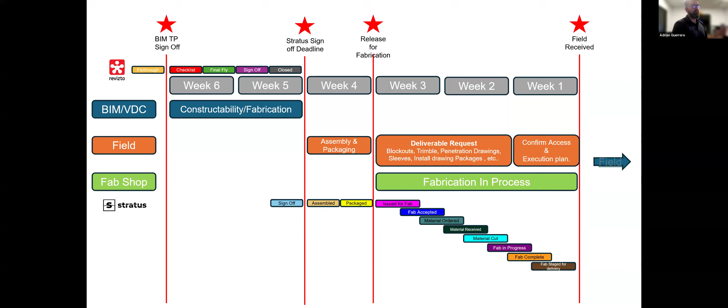Because our model, using Stratus - I don't know if you guys are Stratus users or not - it has to be ready to assemble, fabricate, package from inside your model. You have locked yourself in to having to bring yourself up. It levels up everybody when you get into this world, especially leveraging Stratus, because the model has to be perfect. Then it gets published, you have to kick people out of the model, and all of these things happen. You want to push this to the finish line as close as you can, and we've agreed that 3 weeks before it gets to site is what we need.

And then leveraging Stratus and Revizto together, which I will highlight, you can easily have these conversations. That's why they make such a good pairing in essence. It's really led to a lot of our success, especially for transfer of information, having great visual conversation, not just spreadsheets.

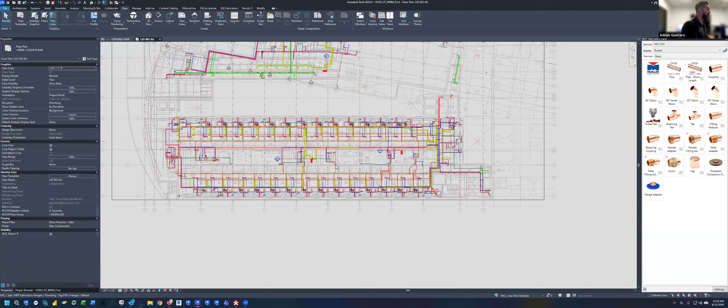And what we're doing is we're obviously designing and detailing. This is a plumbing model that I'm highlighting here. And as we're designing, we have to apply certain properties and parameters that we want Stratus to see for when we publish a copy of our model to Stratus.

As you can see here, what Stratus focuses on is kind of like any constructor. You have a work package. You have assemblies. They don't call them spools for whatever reason, they call them assemblies. Revit does, that's why Stratus had to adopt it. You get package numbers, and we'll go into that.

You get a QR code for Stratus. You'll be able to just create any labels. You'll be able to snap a picture and it'll take you right to the information that you need. A little snapshot, any item numbers, and then the status.

So the status of everything - so as we get to maybe about DD or starting into the CD's population, we start to publish to Stratus. And we want to set up very specific views that we can start curating within this environment, because all this is a snapshot. We're not going to be muddying up what's going on or corrupting anything that's going on in Revit.

So you're going to publish from Revit to here, all those parts and pieces as you design and iterate. And then what we like to go through is we want to make sure that all of our cost categories, all the services that we use within Revit get published here. And then that way, when we're grabbing the parts, it's educating our field, our purchasing side as to what we broke out the cost of the project and how we loaded the project for those cost codes.

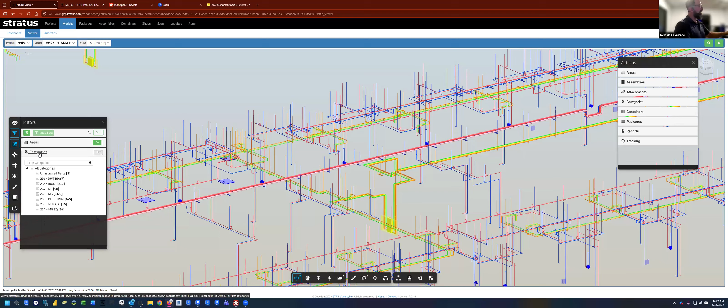So if I'm getting this new shower valve for this project, it's RFA. I'm not going to actually get the ITM. So we will embed those cost codes and those things and the tag numbers of these items. And then we'll start to bring this environment to life. So when we turn it over to the field, they can actually just grab and go and build their packages and their assembly.

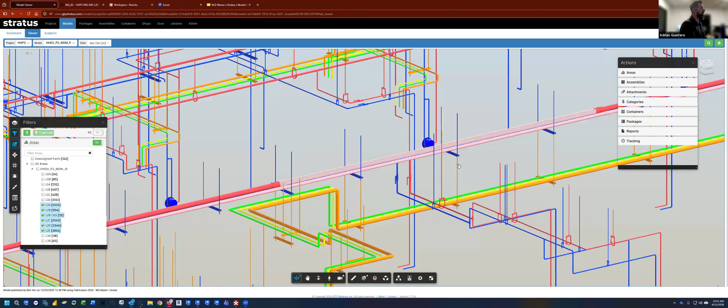So where we start with and everything that we do, what I've done is I've just broken this down into just level 2. And these are built out by areas. And I'll show you what this looks like.

So we're just going to do a quick graphic override of the actual area. So it's overriding - now this is your takt plan, your zoning, your chunking of how the job is going to be constructed. We all have sheets and documents that are match lined and a certain size, but life safety, corridors, how we're actually going to construct the project, they get broken out completely separate.

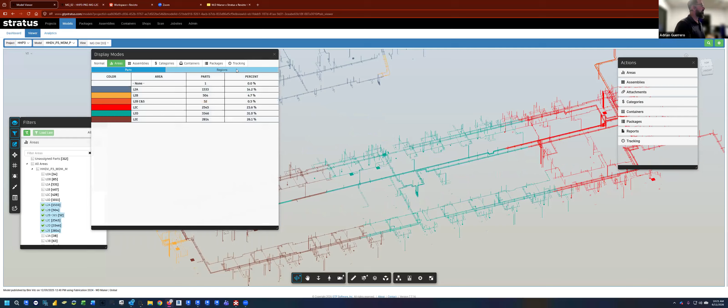So we build these regions within Stratus, which is so advantageous. And this is how the project was actually chunked out to how we had to construct. So we were only allowed, and we started here - we had to start from this side, only affect this area. Then we can affect this area. Then we can affect that area. And Stratus allows us to break that up.

Again, it's transfer of information. It's letting everybody know your focus is here. Stay here, manipulate these packages and these assemblies, get these parts and pieces. As you can see, these are all the parts within each area. So if I'm going to limit to...

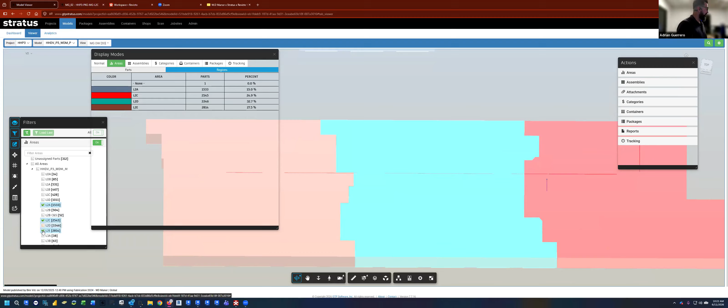Okay, this is the total amount of parts in this area that we're going to be affecting. So we're tracking everything at a part level from when it gets procured, when it gets built, when it gets shipped, when it gets installed, when it gets inspected. So that's what Stratus is doing for you.

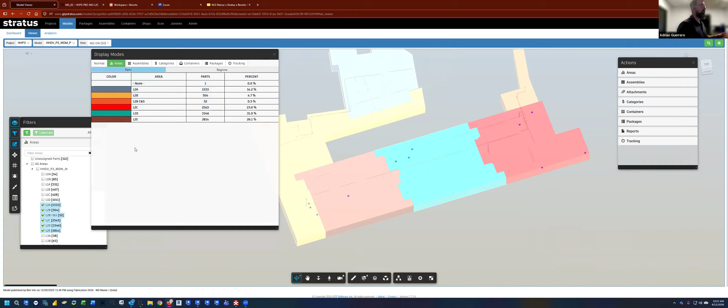As we're building this environment, we take that into Revizto. We'll go over stamps later, but this is a dashboard. We're grabbing that area, grabbing that part, grabbing that property, grabbing the number of parts, and putting them into areas. We're talking area level 2, medical gas.

We have 15,000 parts, and we need this area signed off and ready for constructability by these dates. This allows us to look 2 months ahead of time, so we can start guiding our BIM team to focus on these, because the construction team is getting in there hopefully around 2 months beforehand, starting to plan the project, break out the schedules, going through these things with the project managers.

Then at 4 weeks, we're giving them the model. We're saying it's at a good model health that you can start your fly-throughs. This guides the field team to start looking at what we're populating, how we're breaking out their assemblies, how logistically we've set it up. Can you fit 20 footers in the area? Do you need to cut it down to 12 footers? What is your elevator access? Whatever that is, they can start to help us curate and be successful for that 2 weeks out.

So remember, we talked about the field received and all that, and that full planning, that we needed 3 weeks for the Fab Shop. Well, we need 2 weeks out from that date. This allows us to help guide that healthy tasking, where I go through my checklist - there's a long list of items we go through: make sure optimization is good, make sure we've verified the submittal, that the parts and pieces are correct, make sure all the components are available, make sure that through stamping, all the items being released within that area have been verified by the field, the equipment is in hand, and we've made any model updates.

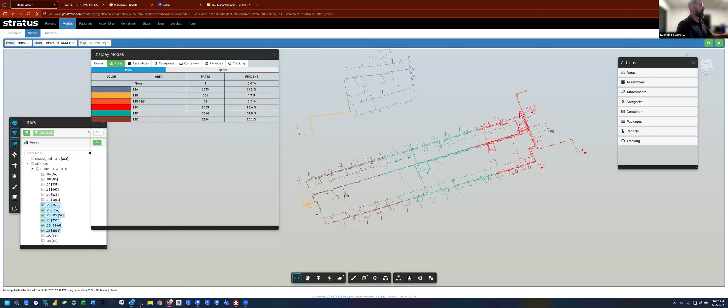So again, this is the override. They would chunk out that area - we're talking medical gas here. They would assign this into Revizto, and we would sign this off and hand it off to them so they can actually start building.

So within this, when you're planning and breaking out, we discussed earlier how we like to have everything at a week's worth of fabrication. If my crew size is 2 individuals, I need a week's worth for 2 individuals. If we have 4 individuals, so on and so forth. Stratus, when you grab the parts and you have ITMs, it can actually give you an estimated amount of time, schedule hours, that we assume it's going to take to install this.

You can apply factors to these things - if it's a greenfield project or an existing project, you can add factors and build upon their charts. So when a foreman breaks these out, they could highlight the area and see, yeah, there's 150 hours, 140 hours - that's 3 individuals per week, I'm going to build this as a package, right? So as they're assembling and building packages, it then educates them.

And then when they get it on site and give it to the field, they're going to monitor how long it took. If it was released on Monday and they were done Thursday, well, now they've educated themselves and educated us that maybe we need to ramp up or take back some of those scheduled hours, so our foreman can feel secure with it. When the general contractors ask us how long does this take, we can give them plus or minus 10% amount of time that we're good to go. So using data has really been a game changer for us.

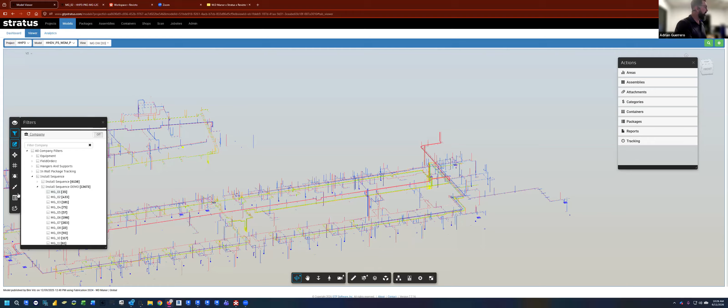So when you're building your packages, that package number we were talking about - every package name comes with the area you're in, the system you're in, the discipline, all of those things, and breaks it out per project. We're using the package number to be the sequence of how we're going to install. Let me give you some context here - if I was to look at the packages, how do I know which one of these packages is going to be first? Look at this laundry list, right?

I don't know which one it is. I'd have to talk to my foreman. He'd have to remind me, he'd have to write it down. You'd have to do all these things.

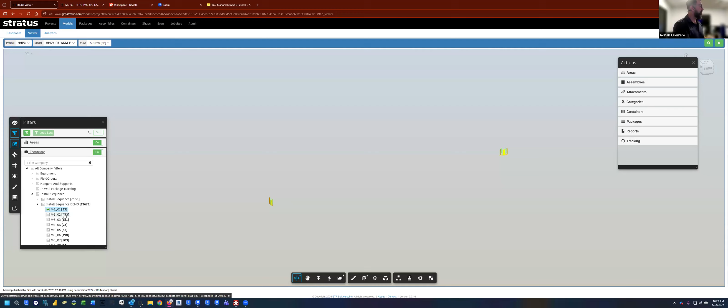But what we're doing is using the package number to be in line with the delivery date. So we'd be installing the zone valve boxes first, then populating this area, and so on and so forth.

We'll be moving through, and I can give this to my field team and allow them to provide feedback. 'We don't have access to this area.' 'Why are you planning for this?' 'Well, why don't we have access?' 'The framers have an RFI and they can't affect that area.'

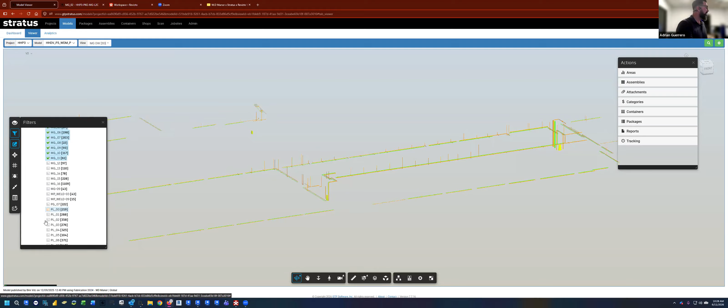We're planning out 3 weeks ahead. Now we need to adjust to another area, and I can just change that sequence and have a good, healthy conversation. Along with that, we have multiple disciplines within our organization - med gas, plumbing, solid waste, duct work - so we need to be cognizant of who's all working within that area.

So then we can start layering and seeing - if you can see my screen, I hope I'm not going too fast - and I can start having conversations as to who's going where. 'We're all in the same area.' 'Well, I'll be on this side of the corridor.' 'You're going to be on this side of the corridor.' And you can just turn on these filters.

You can design any filter as you wish within Stratus and Revizto, and you can see how you sequence the project. This foreman will go first, this foreman will go second, and we have 5 foremen we have to go through for all of our disciplines.

We can have a very visual meeting with everyone, because we kind of stick into this little silo of 'I'm only responsible for this.' As an organization, we're really trying to have everybody step outside and say, okay, you planned for this, great - does that work with your whole team? Then let's expand upon that - does that work with all your trade partners?

So that's our journey, that's what we're on. All these properties, everything within Stratus, gets published and imported right back up to Revit. So it updates Revit with where we are.

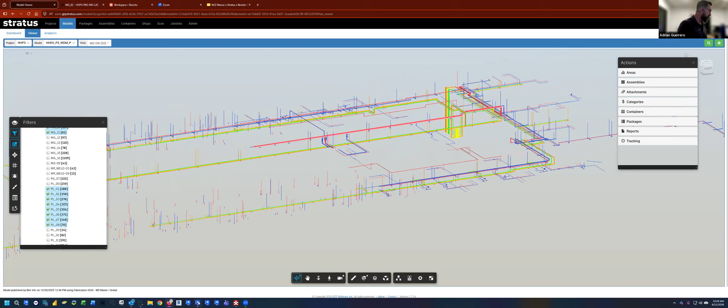So if I'm in Revit and I'm working - and again, we're always getting changes, we're always having to be reactive - you can leverage these filters, just like you would in Revizto and or Stratus, and I can see where the project is. We have the graphic override that if it's red, we can't make any changes or adjustments without talking to the team. So this is true transfer of information.

It does take publishing and importing, but we do that on a scheduled basis so we can be as healthy as possible and understand what all of our members are doing, because we're a team - it's not just different departments. We're trying to talk to each other using these tools.

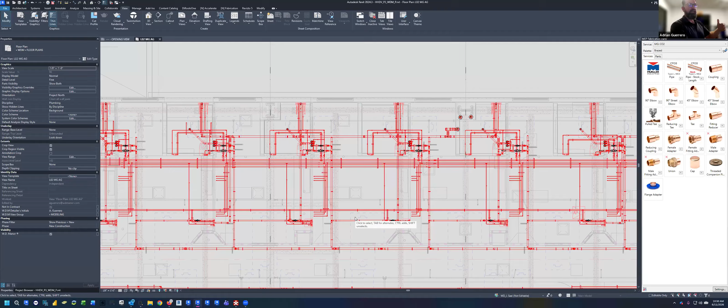So as it gets back into Revit, then on the scheduler for Revizto, we can get these items and information over to Revizto - now this is the project within there. As you can see, we've looked at the parts and pieces, we've planned, but now you can actually plan for construction, because that's where you're going to be losing your hours and losing efficiency. You could be very efficient all the way up to this point.

It's getting it on site into the right area and not having to move it 3 or 4 times, not having to stop because other trades are in the way or because we didn't plan accordingly, and getting that work package up and in the air and then on to the next one.

As soon as you break down that process - and that's just for us internally - as soon as that process breaks down, that's when we become the most inefficient. Because then you have loose assemblies just lying on racks all around the project, and we don't get the racks back, and then we're having to build more racks to accommodate our fabrication, and it just tumbles down.

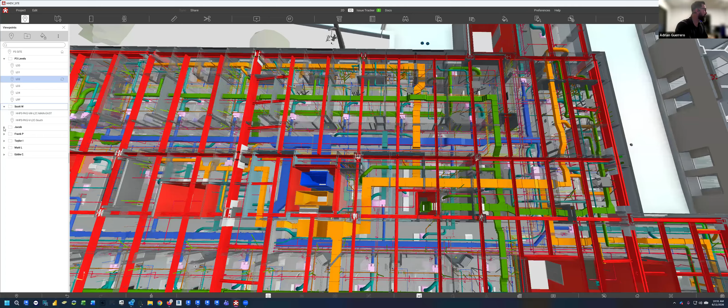So within here, let's just get to the parts and pieces. If you want to look at Revizto, you guys can do all that, but I'm going to show you how it ties into Stratus. So what we do is when we build the actual packages - this is the work package - as soon as they get this work package complete, it falls off on these viewpoints.

So we're only giving the field team enough information for 2 to 3 weeks out - that's what they're going to be working on, and the documents they're going to be working with. We don't leave all the viewpoints for all of it, it just gets too muddy. So I'd suggest cleaning it up and curating these things.

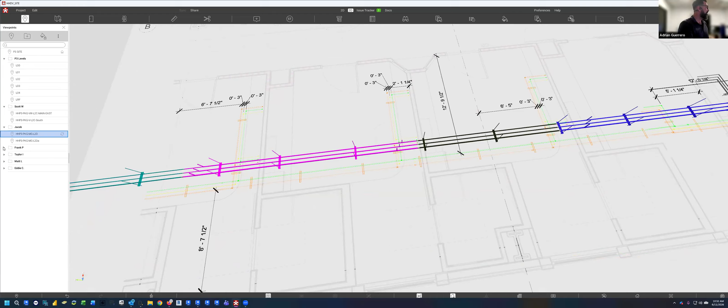So for 3 weeks out, we'd like to populate these viewpoints, which can provide the document and the work package they're going to be working on, right? And again, that's all just a click of a button to your field team. All your property that you get from Stratus is available to you in Revizto.

So you have your favorites that you can set up. If you're looking at only the quick properties - what systems we're looking at, the height, the length, etc. - we need that information as well.

When we're specifically talking about Stratus, we've broken out this graphic override. And what this graphic override is doing - this is the same for the first item number, the first assembly, the first package, the first sequence. It's all the same color coding so they tend to learn visually what they're looking at, without having to select every part and piece to see what it is, right?

So we're taking from Stratus how that graphic override and everything worked, because everybody is so used to that within our organization now. And we're able to mimic that here within Revizto, so they can quickly see what those assemblies and those packages look like.

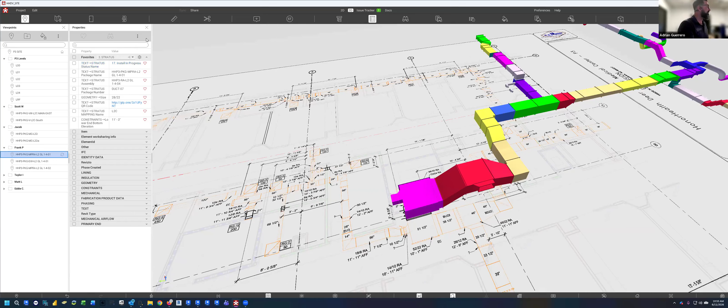Let me get back to here.

These are a few templates that we use. And this is what's great about Revizto - it's easy for a guy like me, who comes from the field, who didn't even have a computer since 2018, just started using models. I could never use AutoCAD. Revit has made it very, very easy. Stratus has made it very easy for actual people that can construct to be successful. And that's what's been so great about it all.

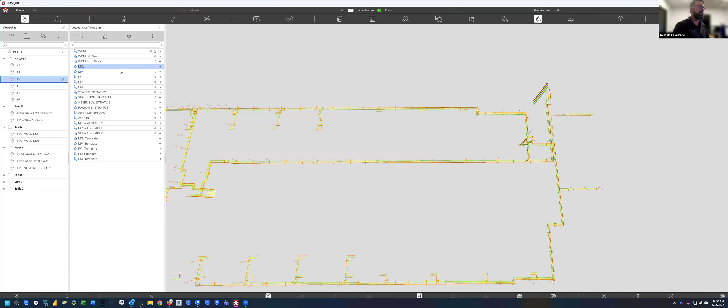And then just the ease of setting up these little quick filters within Revizto is a life changer for us, just for specific deliverables - the status, right? We're talking about the status of the project. Where are we at? You could hover and it'll tell you where we are.

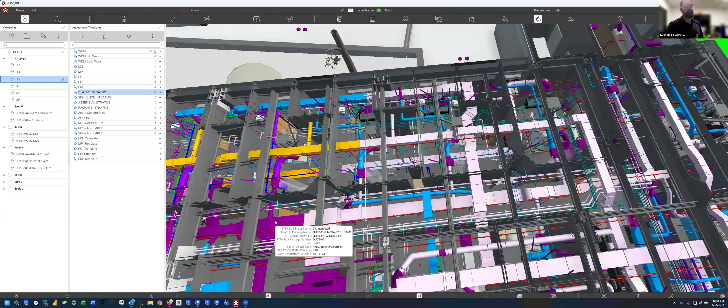So if you're a general contractor, an electrician, or a framer, you know that the packages that look like this with this graphic override are install in progress. If you hover, touch on your iPad, you know that this area has been inspected.

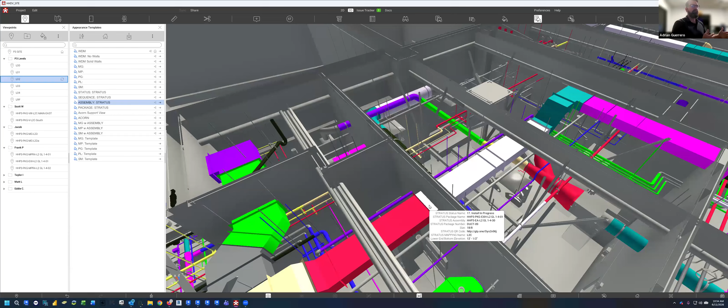You could break out assemblies if you have loose assemblies, or you're trying to have a conversation with the framer, and maybe he needs to leave a little opening for you because your assembly is built a certain way. You can have that conversation and see what your foreman or general foreman had planned for you in the field, or let your foreman know not to ever do this again - this hurts us every time, so we can all educate ourselves.

And then this is just a quick package override. As you can see, it really doesn't - because we're using, I can just show you real quick. This is how we're doing it, in case anybody's interested. There we go, we're just using the wildcard.

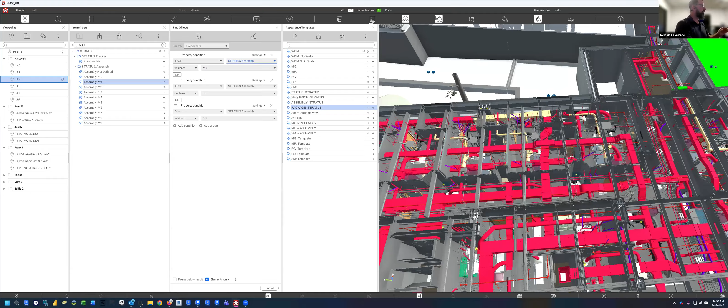And if it ends in a 1 or a 0, all the way to 9, that provides a graphic override. So for item numbers, assemblies, packages, we're using that wildcard with the numbers to do all that. In area A there's only 1 or 2 packages for each discipline, so you're only going to see about 2 graphic overrides. And if the foreman in Stratus just names them all number 1 for whatever reason, you can see here it goes blood red all over the place - so the process is breaking down.

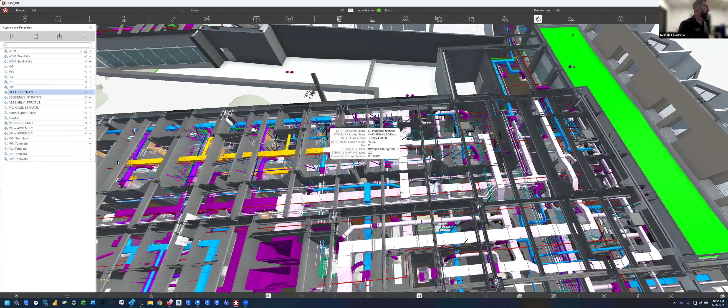But the last of the graphic overrides, which is very valuable, is the sequence. This is where you can see everybody together. So within Stratus, you're looking at your discipline for your view, and you're looking at multiple models, depending on if you break out your med gas, your gravity and pressure piping, your HVAC, and your mechanical dry and wet.

You can start to see here what the planning is and how the project is sequenced. So what we've done is if it's been installed, it turns gray, right? So we can see that it's transparent, that it's already installed, and now I can affect this fabrication.

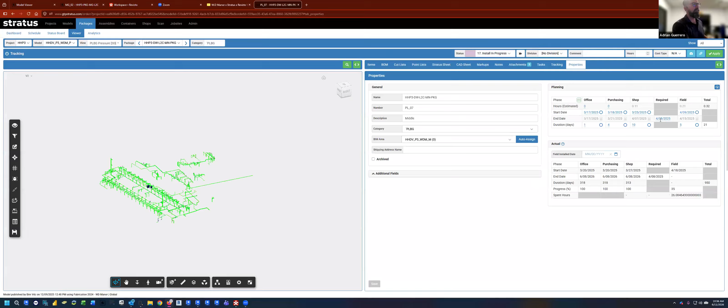If I'm the duct individual and I want to know when this person is going to be installing this, so I can plan for my team because they should have been out of the area, that QR code that's been easily provided by Stratus can be provided to you in Revizto. So I don't need that foreman — I can go into his package and see what his planning is and make sure it aligns with what I need, or if I need to adjust. Right there, this is the required date, and I'd make sure I gave them a week's time to get out of my way, or a few days. Again, it's all about transfer of information.

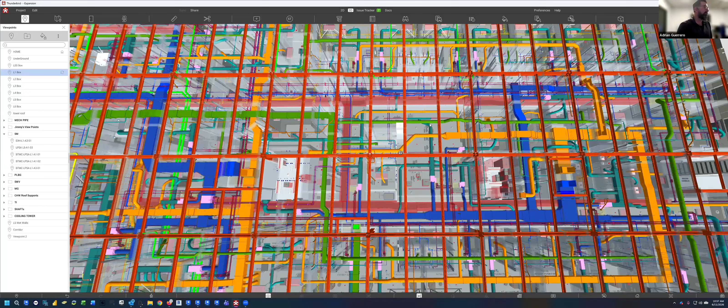So I'm going to jump to a new project — that was just an example. This is actually the live project. That other project I was showing you is complete and has built upon some of the workflows, because we've been with Revizto now for 3 years, Stratus for 5 years. So every project we're learning something new, we're learning how to better protect ourselves.

So going over what we had talked about before, which was how we provide this to our field teams — and this has been really good for us. Let me get to this one. This is how we instruct our field team.

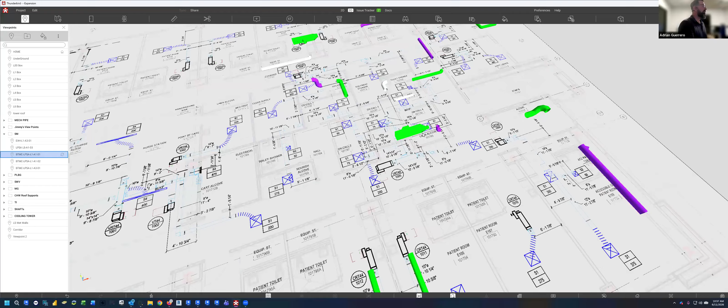Not everybody has a laptop. Not everybody knows how to view a model. Not everybody has been in that 3D world before. They love the 2D documents, and that's just what you have to deal with, what you have to work with. There's nothing wrong with that.

So before we were with Revizto, when we had these models and such, we had to dumb it down. We had to put it in 2D, try to get buy-in for the 3D world, started working on our fabrication being 3D. We got rid of all the paper within our fab shop with the help of Stratus. And now we needed to affect the field. So getting Revizto involved, seeing how you can manipulate their tool — we already had a workflow, we already had things we were good at, it was just that we didn't have the right tools. Bringing in Revizto gave us that tool.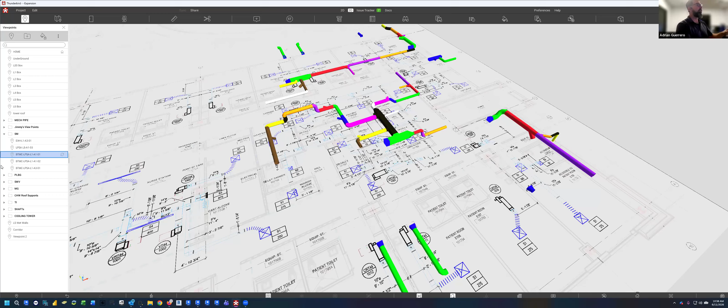So getting out there and instructing, we instruct our field to get to this viewpoint, and that starts them. It gives them their 2D doc, and it shows them the week's worth of work for this low pressure design that they need to install. And we instruct them to go here — the people that love 2D, this is where they live. So usually we try to team them up with somebody that can manipulate the model, but also 2D.

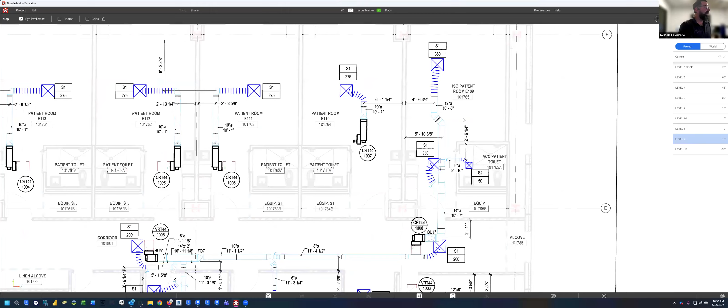If they want to get any measurements, they have it here. They're not going to get lost and flown out in the middle of nowhere trying to find something — they're so afraid of pushing the wrong buttons. This here just gives you a 3D kind of look, but it's in 2D form. You can't get lost. And when they're trying to affect a very specific part, they just double tap on their iPad and this is where they are. Then they double tap their finger and they know which assemblies they need to be installing, or how they're sorting, or how they're going room to room laying out for everybody.

So we've gone from Revizto 3 years ago, from having to have these packets and everything, even to the early days of Stratus, where we'd have your ISO drawings, plan view drawings, and hanger drawings. We're upwards now from, let's say 2 years ago, we had 12 iPads in the field, and we're allowing the field to dictate what they're going to use — is it drawings we're printing, or are you going to use iPads? Now we're upwards of 70, in 2 years. So that's how it's just catching fire — we can't train enough. And the individuals who were kind of hesitant, if you provide the information this way — I'm not saying you have to do it this way, but we have found success.

Give them the 3D, give them the graphic overrides, give them a 2D document. And then for the most part, by the time they're done with the project, everybody is able to manipulate the model, look at the assemblies.

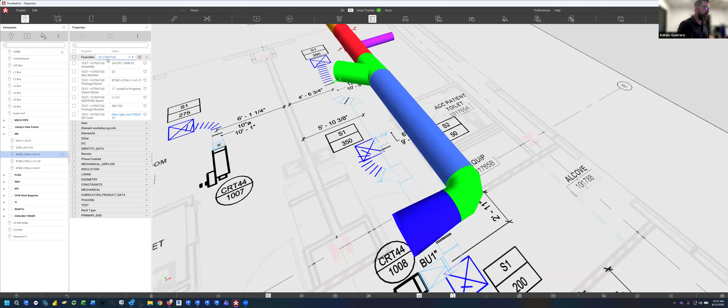I hope I'm good on time because I wanted to go over one last thing, and that was the issue tracker.

What have we dreamt about for so long is connecting upstream to downstream, letting the Fab Shop know our successes and where we fall short, letting the BIM team know the same thing, letting the field educate us on what their choke points are, and just having that conversation.

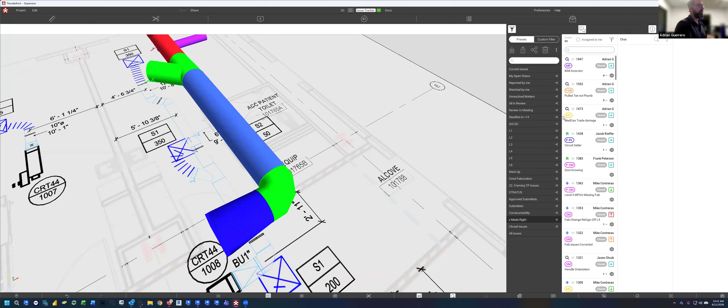They provide these pins and they give you a stamp template here. This is just one. The BIM was incorrect. So all the efforts that we did, everything that we have done, just like mud on our face, I'm highlighting here, they drew it backwards.

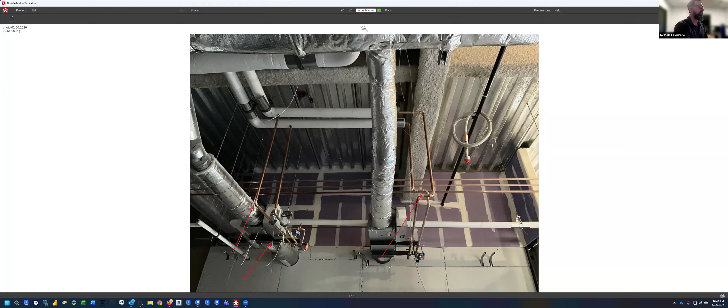There was probably a change, something that flipped. The VAV was probably one instance of design and it flipped and we didn't capture it. So then the field team had to flip this around because we designed it this way. And obviously, everybody says in the BIM world, everything works.

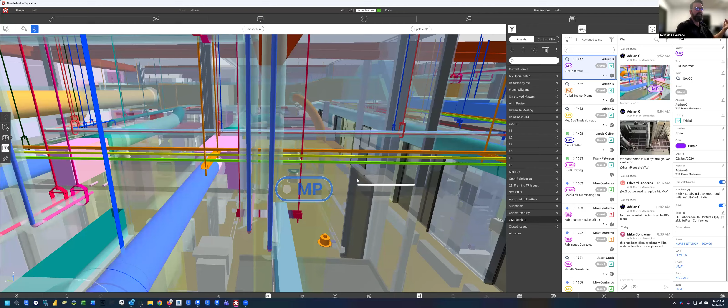But now I'm able to bring this up. I'm able to give this to our BIM team and be like, look, I'm not coming down on you, but these are the mistakes that you have made, and let them take that upon themselves. Again, checklists, all these things, and they can educate them, right? And we're just having really good open conversation.

With the Fab Shop, I used to have to go to the field, walk it, ask if there was any issues, get the information, bring it back to the Fab Shop, type up like a little incident report, like, hey, this happened. Well, the Fab Shop is in, right? The Fab Shop can see these.

These stamps are directed to me and the Fab Shop, and they can see that we didn't have these pulled tees both plumb level square. So now we know that we need to go talk to the individual that's manufacturing these things and say, hey, is the tool letting you down? What's going on? Are we not level? Do we have like a slight degree off on the setup?

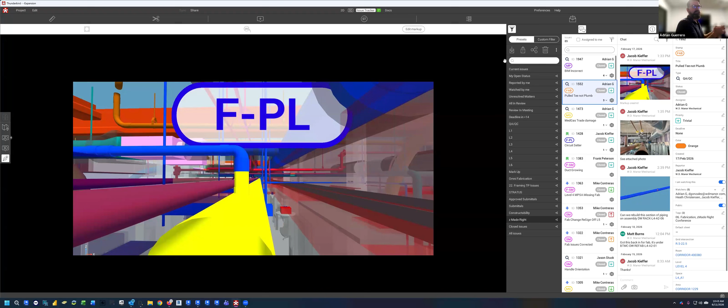Like what's going on? And this individual was training another individual, and we can see that from Stratus that this person was training this person, and that there's just more education needed, right?

So the true transfer of information, we also can grab trade damage, right? So what did the field act? What was their experience, right? When we're trying to have open conversations and you kind of just take care of these things in a silo somewhere, you're in the field, like I'm from the field. I don't want to have all these conversations and incident reports and all this. I just get it done, I get it fixed. But that doesn't help us at an organizational level, right?

We want to know that if the trade partners we're working with are good trade partners, right? Like when they hire WD Manor, they hire a specific level of quality. And we can speak to when we go to these interviews and we're working with trade, be like, look, the last job we were on, these are all the issues, all the trade damage that you had done to our systems. Are you going to be better? And they're like, I didn't know anything about this.

And it's like you can have reports from Revizto and you just look to very specific filters. And then our field team is just applying those little tags and we can run reports and then offer it up for any organization to make themselves better. And then again, if they were using Revizto, they could offer that up to us to help us be better. So the stamps have really cut down, there's education, there's training, yes. We all have conversations.

We all memorialize things in different ways. It's like, learn to use this tool in this way, it's still the same task, but just use this tool in doing it, and the transfer of information is seamless, right? So it's been very successful.

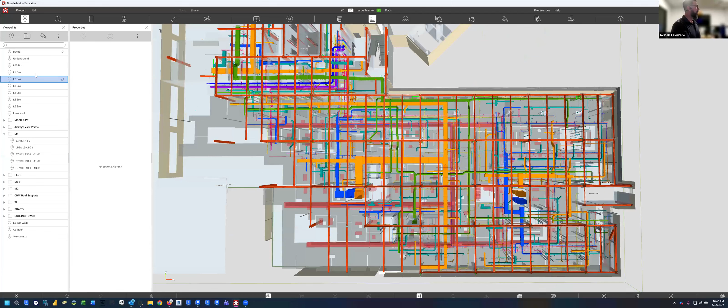Okay, because this is where we hurt ourselves as an organization. Again, from the package number, that ties to the date as we populate the package. It puts the stamp of the incrementer of, this is package 45, this is package 46, and then you issue it off. So that gives us the actual sequence of install.

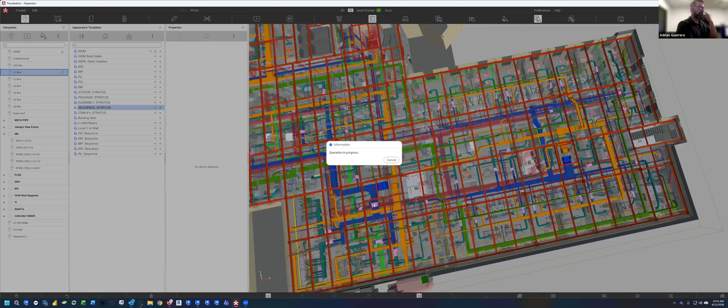So when you're looking at and you're coordinating, right? So this is this project right now. This is what they're working on. Now you can see that everything else is done in this project. They're just tying in the low pressure. All the other systems are done.

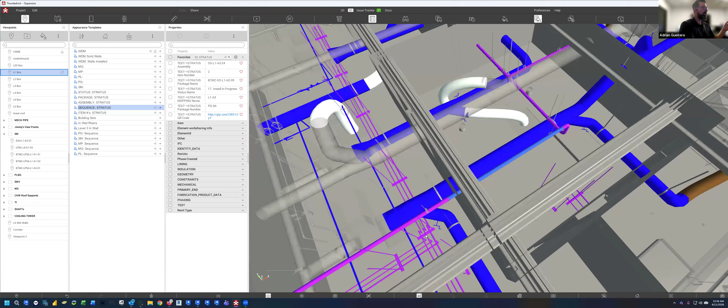Let's try to find the one that we need to have a conversation about. All right, now this one. This is not that big a deal, but this system definitely should get installed earlier. I think they could work around the duct, but definitely not the med gas. So I would have a conversation.

I would talk to my sanitary group, and I would look at what is their schedule. Are they ahead of me? Then I would talk to the duct individual - when are you installing this? Now I could go look at Stratus right now, but we don't have the time. And then I could talk to the med gas guy because they're all planning right now.

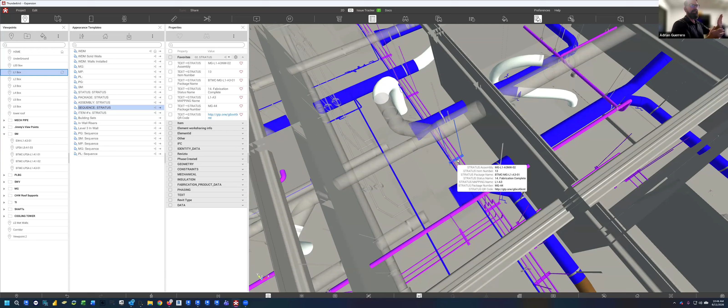They're only going to populate these because we put a condition in here that says only when it's in fabrication, past fabrication planning, will you highlight this graphic override. So if there's pre-planning, that's not - it's, we have tracking statuses. Let me show you those.

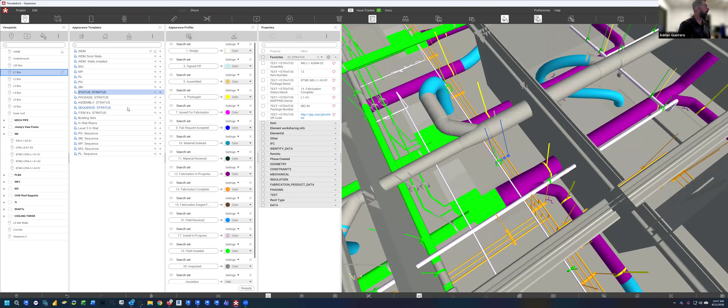So you have designed, signed off, assembled, packaged. If it's in any one of those, we're not looking to it within Revizto, right? Again, there's a handoff from the Fab Shop to Revizto, from the design to Revizto. When it gets to Revizto, when it gets issued for Fab, again, that's that 3-week look ahead, that time that we give our Fab Shop. That's the only time that I want to see any kind of planning, because then it's just too visual for everybody. There's just too much going on to absorb.

And then again, if anything is already complete and installed, it kind of just turns in this transparent gray.

So this has been good for us because all too often, we have our own foreman kind of planning their own ways, and we all know how difficult schedules are. And we're trying to interpret an interpretation of a schedule. It's very difficult these days. Some generals are very good at providing us schedules, and trade partners are good about keeping to those. And sometimes it's just never going to happen.

So we get lost in our planning and our adjustments and our being reactive, and we end up hurting ourselves, putting up a rack of pipe when good and well we know that there's soil waste and vent and ductwork that needs to go above it, and we've had to cut it down on this project that knows these tools, that have these tools available to them. We have done that to ourselves.

So this isn't going to fix everything for you, but how many times did we capture that, right? And that's what we're shooting for. It's so unfortunate - it's construction, these things happen. But the more we can mitigate those things with tying in Stratus and Revizto, it's been a pretty exciting journey. We're happy the path that we're on, and we'll give it back to you guys.

Awesome. Thanks, Adrian. Yeah, this is really fantastic use of property data that is available, right? Taking it to the level where you guys are getting to actual sequencing and being able to review that is, to me, wildly impressive. So thank you for sharing this with everybody.

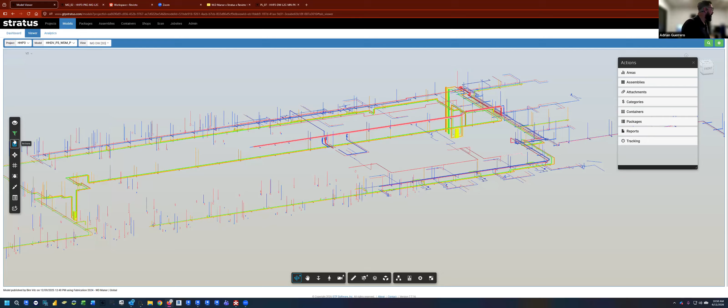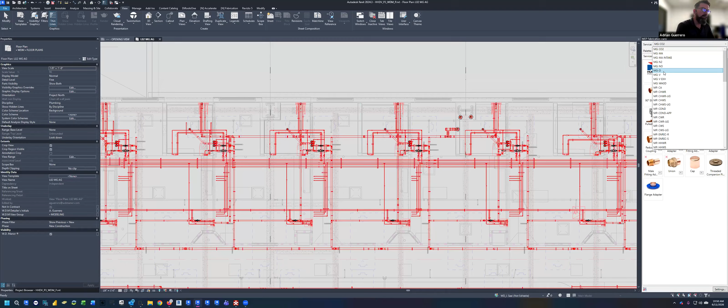We want to know as an organization how well we're doing. The best way to do that, what we found, is by system - we break down everything by the actual system and by the palette that we draw with, so they kind of go hand in hand. When it gets to equipment, plumbing equipment is broken out as a separate specialty, mechanical equipment is broken out too. We do Trimble of all our BIM content, and we've learned that the Trimble process makes us more efficient because we have so many disciplines - we can't just say it's heating hot water, we have to get all the Trimble, all the embeds. If we're going to drill, we get all the drilling done at one time, so we capture that cost on its own as the Trimble cost code. Other than that, any install from the hangers of the discipline goes to the actual discipline, cut and dry. That way you can see the med gas did well - we had hangers and install - the domestic water did well or not so well, and we can break that out. Those are all loaded into the project so we can apply them in our time. I hope that answers your question.

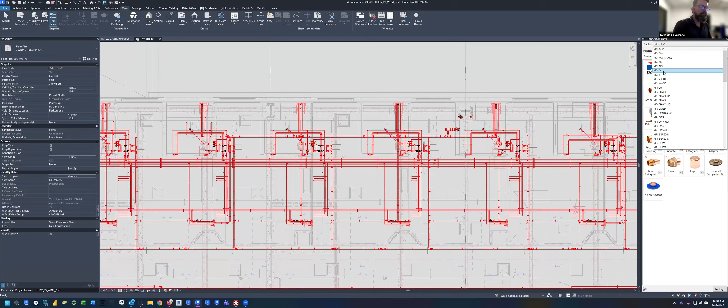And then the filters - again, I'm looking for those palettes we're drawing with. I apply it to the filter, to the cost category, and that puts it here within Stratus. That's the end of that cycle.

Have you looked into 4D simulation capabilities of Stratus? No. Nathan, can you touch on that quickly - what about the 4D simulation capabilities? I think there might be a typo. We have 2D and 3D, those plan views that Adrian was showing, but I don't think we have 4D capabilities for Stratus right now. We've done 2D capabilities within Stratus. One of our choke points is Indian reservations and places like that where we don't have internet connectivity.

So we had to find other ways - Bluebeam sessions or Bluebeam projects to upload documents and leverage snapshots and stuff like that. Having Revizto able to download the content onto your app without using internet connectivity, we've chosen to go that path for our workflow. I know we've had it here in Stratus on certain projects, but we've moved everything over into that environment. Our integrated hub is Revizto - we want to visualize everything in the field through Revizto. That's just what we've chosen.

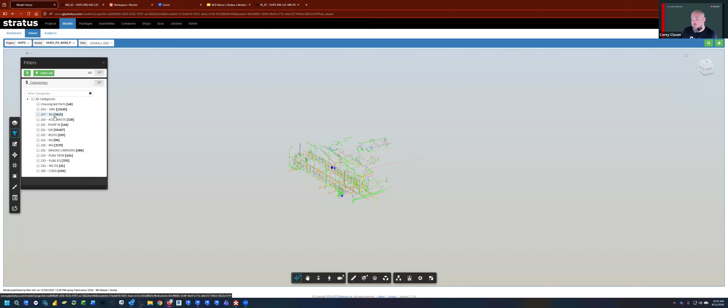Awesome, I'll take the next question. Is there any way to connect Revizto API, Stratus API to show the element statuses live? Or is there a daily sync between Revizto and Stratus?

Currently, it is not possible to link our API directly with Stratus. It's something we would absolutely 100% love to work towards, but right now it doesn't exist. So the sync of information - you could do it multiple times a day, I guess - up to Stratus, back down from Stratus into Revit, Revit to Revizto, is the current workflow to update these statuses in Revizto. That's the way we do it.

Tara asks, how do you turn on category filters on Stratus and input cost codes? Sure, let me just show you what that looks like.

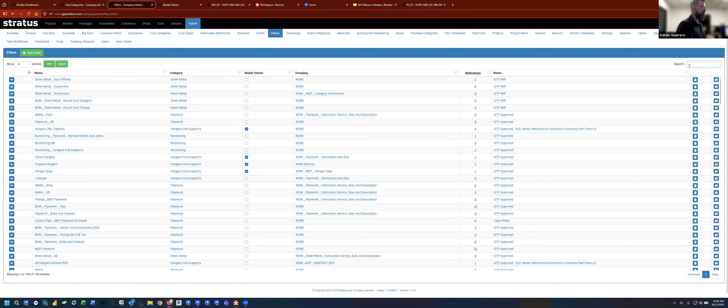Cost categories in your admin - you need to write filters. Again, we use the palette as service discipline, so we use filters here. Okay, so our chilled water - we're looking for these, right? This is everything that ties into that cost category.

So then when you get in the cost category section of Stratus, you will create a new cost category with the filter that you have created, apply the code, and then that is available to you. So when you import those parts from Revit and they come through, they get captured through that filter, and then you can have them available here.

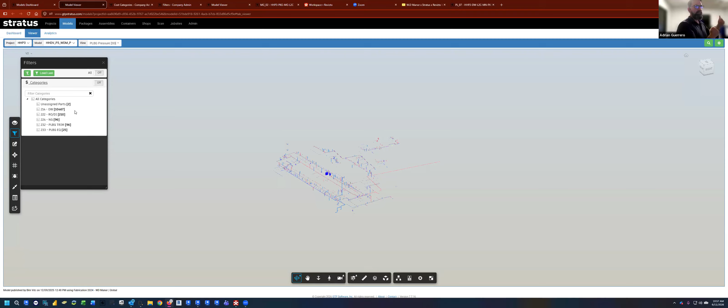If you do not have that filter built, it will not take. So when you're missing parts, I can't just create the filter and have it suddenly be ready - it has to be on the publish import part of the process. So create your filters, go through all of that, create your cost codes, then import everything from Stratus up to Revit and then publish back. Then you can have that show you the result, but it doesn't do it automatically - it has to be import, publish.

Nathan, the next question is for you. Is there a way to speed up the process of uploading a model to Stratus, or a way to optimize it? Yeah, optimizing is probably the better word.

From Revit, what's in that view is going to get published up. So there's certain things that Stratus doesn't need to have in order to function perfectly. Turning off things like your insulation or center lines or content that's not going to be fabricated within Stratus - that's going to speed up that publish process.

Also, making sure that family complexity is something that is looked at - so looking at your database and how things are kind of put together. If there's unnecessary information on these parts, or if third party software has added more parameters to those parts, removing the unnecessary parameters that don't need to come in - those types of things will speed up the publish process.

Yeah, that was one thing that hurt us a lot when we started - the evolved parameters. We didn't really understand what we were doing when we were creating a database and workflows, and it was tying in 400 parameters to every part and piece. So it was taking an exhausting amount of time. Really understanding your database, understanding what those parts and pieces are, cleaning up your views, model health - all these things really help.

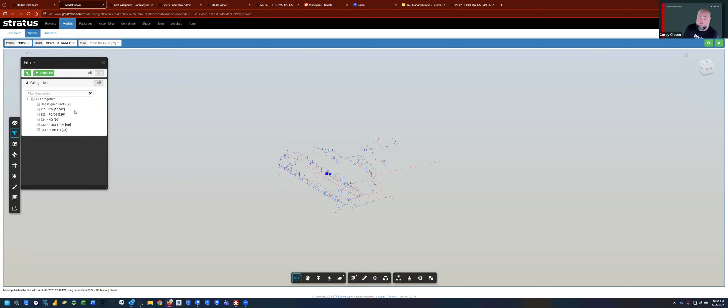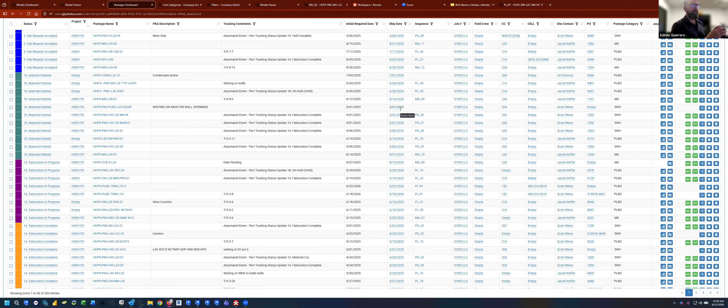So we're planning, we bring up our dashboards, right? We look at the dates in these dashboards. This is all the models, and these are the dates. You can see how they're all going to align and arrive on site at a specific time.

The best way we've learned is through having a conversation with the plumbing team, letting them talk it through, very visual, while the mechanical team is in the room. So we start to go through it. This is early on, before we're releasing anything.

And we start to highlight and show... as soon as you get online it slows things down, but we'll try it.

What we'll do is go over, like, this is my planning for area A, like we were talking about. I'm going to work with this package, this package, this package, because that's the flow of how I need to install and test. And then they're like, okay, and they know what their planning is. You're all in the same room.

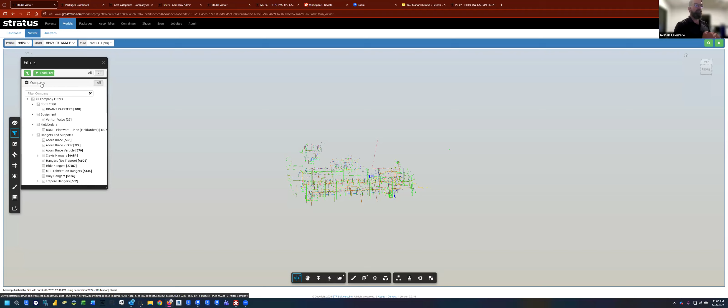We actually have a sequencing meeting once a week. We go over what our planning is for the next 3 weeks. But what we've done is added this to the last couple projects, so that way we could just turn on a couple and get into gravity.

If their sequencer is aligned - we've had some issues where the foreman built a package in the wrong sequence and didn't change it - all you have to do is change the sequence. If your intent is to have this one first, this one second, this one third, and it changes because things change, you need to get back in there, make a quick adjustment, change those sequences, and then this will come over correctly. Then we can see where the overlap is here.

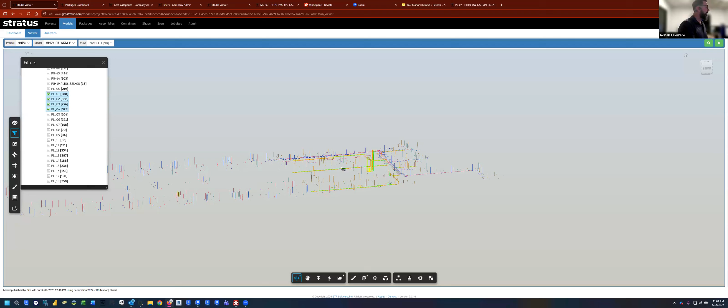And you can only do this by model, right? So we can do this just for the plumbing model and mechanical, but then that's how we get into the overall kind of quick look through Stratus.

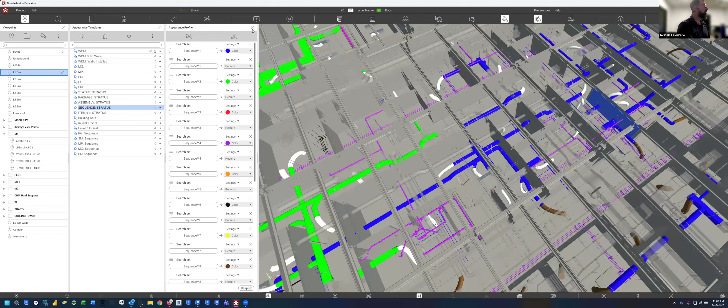And then we agree that it's healthy because we're all competent individuals. But the finite window is a week - we want to be a week ahead of fabrication, so it's in the second week before it actually gets into fab. You want to look at that last area you're going to affect and see if there needs to be a couple day adjustment. This would be a good example here.

I'd be like, okay, we're working in this area for two weeks out. Are we still tracking? Is your team falling short? Do you need to be more aggressive? All these things, we need to be reactive.

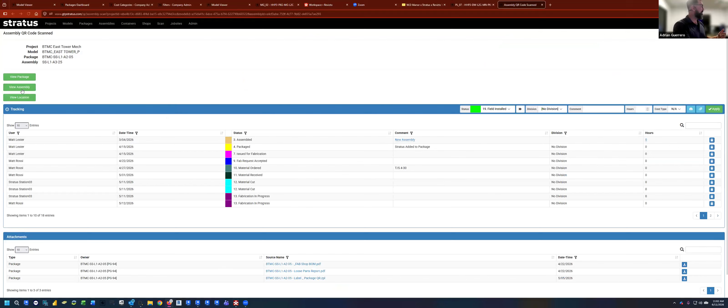So we'd get in here, they would know their dates, and they're looking at it on their own computer. But again, if they're missing from the meeting - because we've had that before - I can verify here. Let's just do it real quick. We're gonna go to the package and see what their planning is.

So this doesn't work, I mean, let's go talk to them. All right, 5:13, okay, so we're there. So they need to get this installed at 5:13. I'm hoping that the duct guy is after 5:13. Let's go look.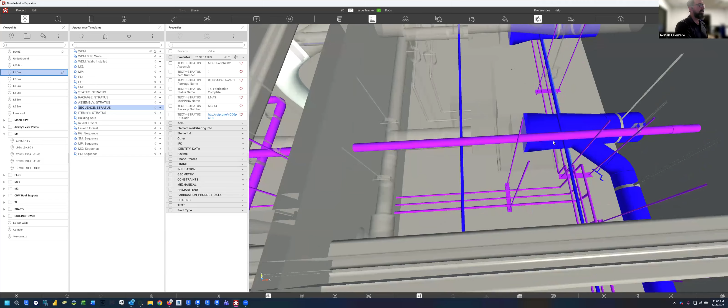So it looks like the soil, waste and vent, and the rack was agreed upon that they're going to go after each other. And I think the duct guy probably just said we can get above it and tie into that VAV. And that's the kind of conversation you can have - be like, no, we can get in there, we can pop that in, it's not a big deal. So I hope they had that. This is definitely going to get installed first, this is installed last. I think that's healthy. I would call that a success.

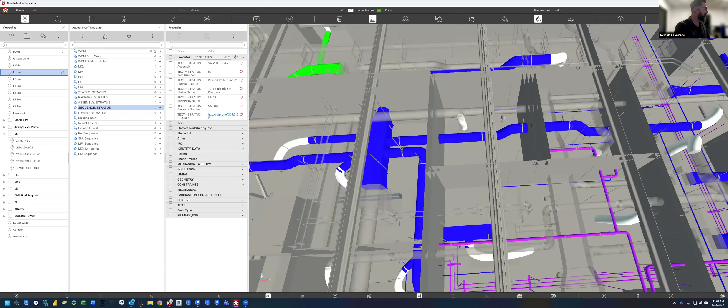But that's exactly what we would do. We would start out, and before releasing what our planning is in Stratus, go through that sequencer just like we did. Everybody's in the meeting, everybody's agreeing like, yeah, that's a pretty good plan. It gets into procurement, gets into the Fab Shop's hands the week before, it gets into Fab, right?

That week prior, are we still tracking? Are we still good? Do we need to change this optimization anyway, which happens quite a bit? We just change the sequence and then let the Fab Shop know, make sure they can accommodate the adjustments. And then we get it into Fab and get it on site on that field receive date.

Very quick meeting, believe it or not. If you think about it, we are 250 to 300 individuals in our organization. We have 6 greenfield projects running this process, and the rest is just maintenance and small projects. Your work packages on these buildings could be from 200 square feet to 200,000 square feet to 500,000 square feet. The amount of crews you have is really only 2 or 3 crews per foreman.

So you're only planning for 2 or 3 packages. When you break it down and eat the elephant, small bites at a time like that, those conversations come easier and easier. It was very difficult at first to have them understand the sequencing and how it ties into your date—you don't get the dates in Revizto. But after the first 3 weeks of the project kickoff, we were in full swing, and it's been quite a success in the last 2 projects.

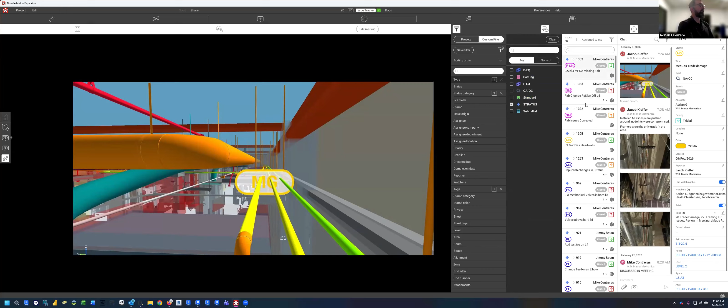So in your, we created a type. Okay, that type. Where is it at? There it is. Stratus—okay, so we created the types, and they're Stratus types. And when we're grabbing the area and grabbing the parts, we're putting a deadline to it. So this deadline was January 23rd. We needed to put a deadline.

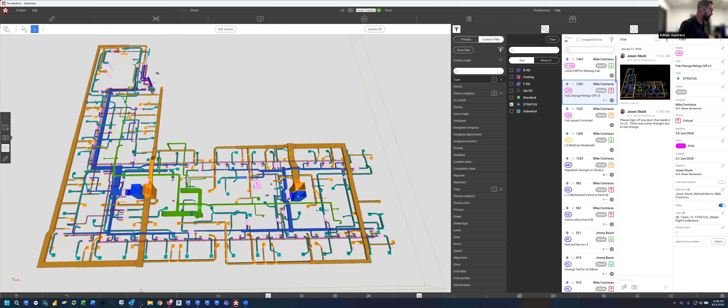And this is—let me go to my slides. You could probably remember, so this is the deadline, 6 weeks out. That way we could start the whole process of curating and getting it done. So we're doing that pull plan by the deadline, by the type stamp. Then we go through each one of these. All right, so this is med gas—this one was the 16th of December.

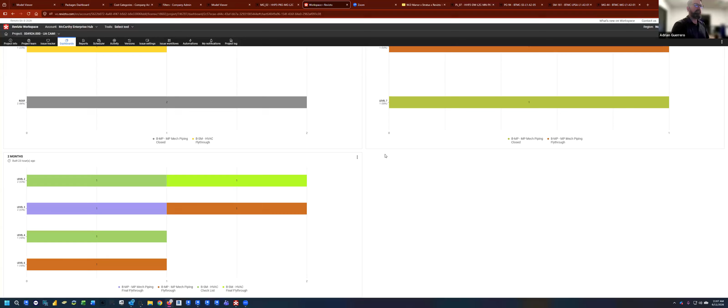This one was the 14th of November. So all of those populate the list here. We want them to grab as soon as we have parts available to them, and we should by 2 months out—that's our goal, 2 months out to have the foreman in there and the superintendent start to build the schedules. As soon as you put the deadlines of when you need that fabrication to be on site, and then you do your pull back for that 6 weeks, that gives us this workflow.

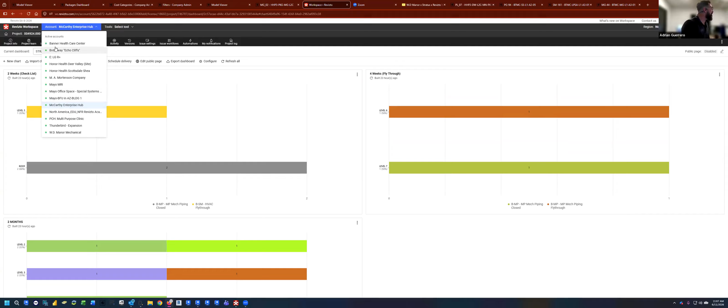So this is actually a longer list, and I can show you a longer list here of what it looks like when you're actually in the middle of a project. So here—oh yeah, no, this is scanning. Yeah, let me go here. I'll show you what it looks like when it's all of them.

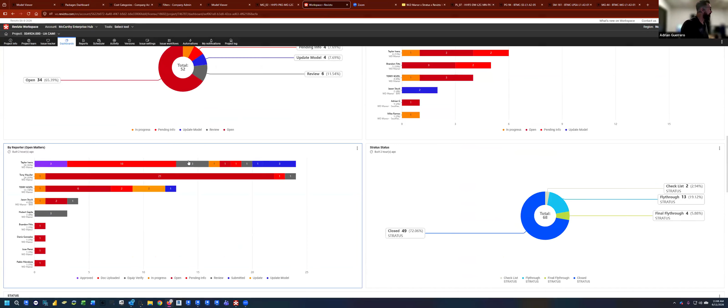So this is it, right? These are all the stamps that we have per discipline, per area that we need, because you don't want to release the whole floor—it's too overwhelming. So each foreman, we have each detailer—our BIM department's 11 individuals—so they chunk out: I need this area done, I need this area done by discipline, right? Because I need to affect all this area at once. And that helps them from the schedule build and helps guide us in here to know what needs to be affected.

We're hopefully going to start in the way the building is constructed, basement up. And then we start knocking each one of those areas off, getting it ready for construction by the time they have dictated here on the deadline. I hope that explains it. It's all driven by the deadline, all by our work process of 6 weeks that we like to hold ourselves to.

It goes through the checklist process, goes through the fly-through process, goes through the curating, assembling, all that stuff, and then gets released.

I think I can handle the next question. How are changes made on site, and how do you reflect them back to the digital model? I'm going to make an assumption that you guys are using the Stratus link to go back to the internet to update it in Stratus, and then the next time you pull that information down from Stratus into Revit, it lives there. And then when you publish to Revizto, it's updated there. Is that correct? Exactly right.

So we want to walk that package with that foreman or lead guy in the field. What went well? What didn't go well? QA, QC. After that process, we hit the button and transfer it over to field installed. And then we know within our organization that the person who did the planning learned as much as they can, and it's to quality. That's our QA, QC that we offer up to the general contractor.

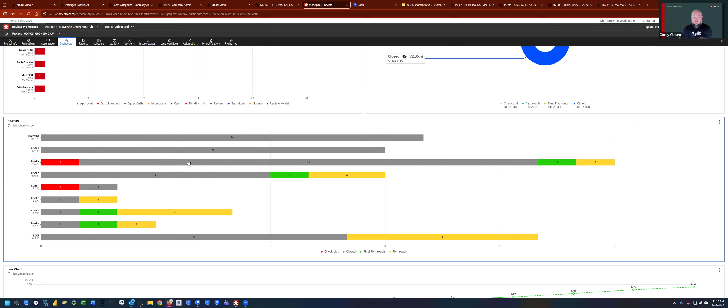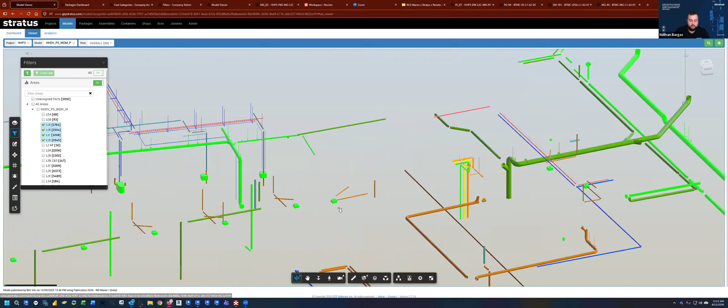All of the parts that are brought into Stratus are modeled on a level in Revit, so that part information is contained in those parts. If all of that assembly lives on level 1, then that answer would be the same for all of those parts, and that would be a parameter you could put on a dashboard where all of the cumulative part data for that assembly would reflect level 1. So it just lives on the part.

Yeah, I would offer up not to do that, because our detailers are detail oriented, but when you draw in 3D, the levels don't always go with it. So we always have parts floating around everywhere, and we go through and curate and try to adjust them. But if you create these areas, it's like a filter, and those parts go through that filter and it assigns them to the areas. So if that area is level 1, level 2, level 3, no matter what level you incorrectly draw it on by accident, and you haven't curated it, it always captures it in that net, and you'll never have any problems.

We've tried and exhausted so many workflows to make sure everything is on the right level, and it's a task in itself. But Stratus has fixed that for us by being able to create these areas, and it always catches it. That's the parameter that ties to our parts, which ties to our assemblies, which ties to our packets. So if anybody's figured out how to always have the right part on the right level, I wish they'd just let us know.

So contact WD Manor and tell us. Yeah, just call the front office. Talk directly to Adrian after. Ask Adrian, please help us.

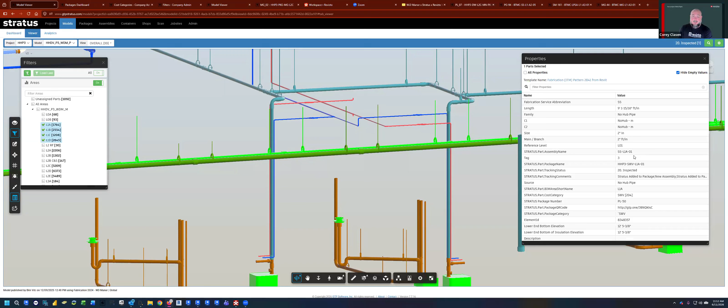Your project, made right. That's our motto, and our new guiding light over here at Revizto. I'm pretty sure we can extend that over to Stratus as well, because they're helping us get the right information to the right people when we need it to get there.